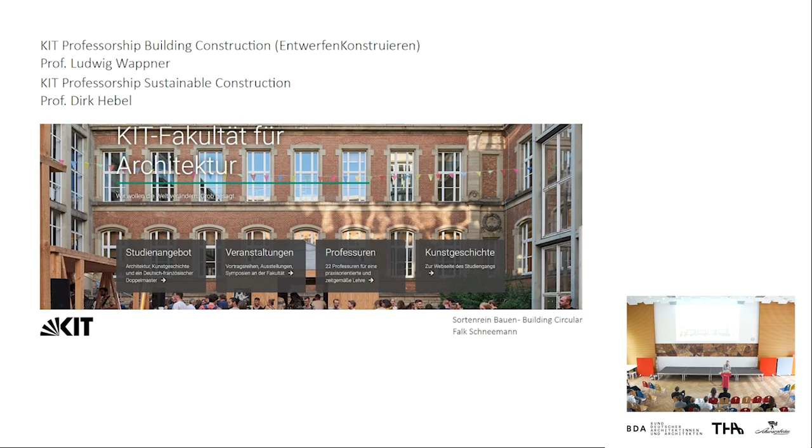Obviously there's a lot of overlap in what the two chairs do, but each chair felt there's also a lack, that we would need what the others can deliver. So we said, okay, let's join forces. We started, that must have been 2020, by doing a seminar which both chairs did together. That was not a fantastic, great thing, but something which was very interesting. We realized that we also had some problems. We found a need to define certain things, and that's what we tried to do with the book.

So we felt the need to define what is sustainable circular building. What is that? We felt that we need to provoke a little bit of a discussion, kind of a philosophy, to approach it also with regards to discussion before you start to design, to construct everything. We felt we need a stable manual, right? You have the Stahlbauatlas, you have the Holzbauatlas and all those things, but there is nothing you pick from the shelf if you ask yourself how do I approach sustainable circular building?

And of course, as architects, we feel the need to give an impulse for future things. I think I don't have to introduce why we think we need to build circular, right? I won't show you those slides of the blue planet and all the problems we're having at the moment. I presume you are aware of that, so I go right into the juicy bit, as there's not too much time to talk about that.

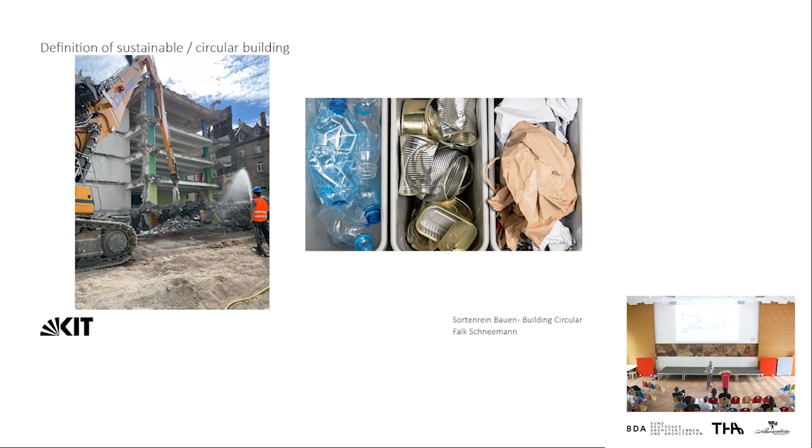It's exactly the same as what we try to do with the garbage from our living. If a house is at the end of its life, and we have a pile of metal, a pile of wood, a pile of glass, then we are fine, we can use that again. This means Sortenrein Bauen, that we separate them to keep them in the loop.

To be clear, that doesn't mean we want to disassemble everything down to only materials. It also applies to building elements, right? For example, a window. We don't have to destroy it to only keep the glass in the loop, if we are able to say, I reuse the whole window.

And buildings were not designed from scratch - those famous buildings you all know are not designed by one architect, but are the result of a long process of building and adding and taking away and so forth.

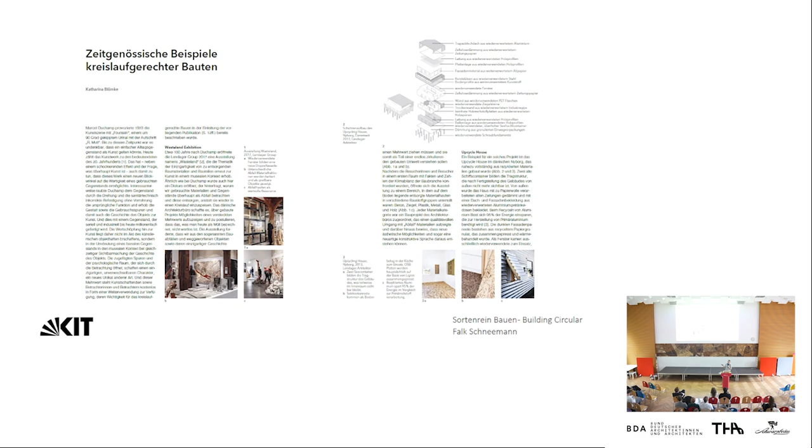Of course, to be able to contribute to the discussion, you need to be aware of what's going on right now. There are a lot of buildings, pavilions and so forth being built, not only in Venice at the Biennale, but around the world, and there is really interesting stuff going on, and you can learn a lot from that.

So the next step is to say we go closer to building. That means you need to choose the right materials. Very essential at the beginning is to say, with what do I want to build? And we have a catalog of materials in our book as well, and our philosophy to this.

That's really like, I'm standing here, so what I tell you is also my philosophy. Not everybody on the team has exactly the same philosophy, but I think there's a core which unites us, so you have to separate a bit. Probably other people from the team would tell it differently, but I think the core is the same.

So we also don't think too much in terms of good and bad. At the moment, if you look at building in Germany, it's built in wood - wood is good, concrete is bad - and we don't think that's entirely true, but you have to differentiate. Concrete can be good as well, also if you look at circular building. We discuss a lot of materials in the book and help to understand them.

And then when it comes to the building, we think you have to also look a little at what's going on - building strategies, let's say - and we're very much interested in digital tools because we think they help a lot with circular building.

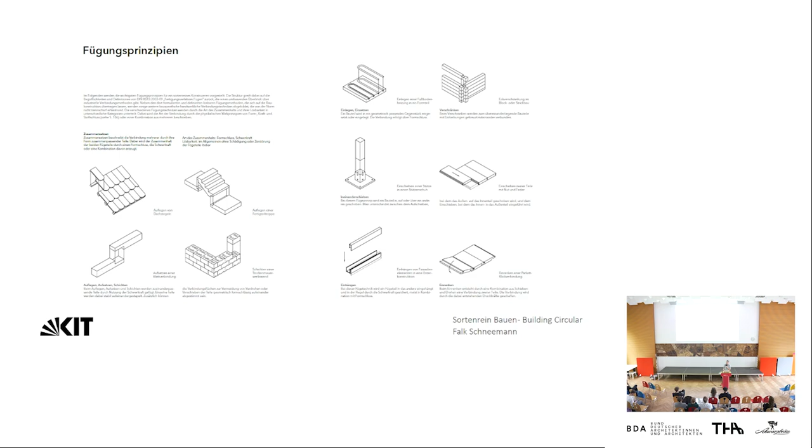And if I want to reuse something, you need to be able to understand, right? I put a column onto the floor - what does that mean? How do I put it there, and how can I take it away, and so forth? So we have a catalog of how do we join things, and the next step is layering, right?

We need to understand, like in a wall or in a floor, what's going on there. It's like we need insulation, we need to make it windproof, it needs to be able to stand certain loads, and so forth and so forth. How do we do it?

And the layering does allow us to take things apart again, because obviously in recent building in Germany, the tendency is to glue everything together, right? The word Wärmedämmverbundsystem, for example, says it all - you glue it all together, and that works well for a certain time, but then you're in a dead end.

That gluing things together, that's something we want to avoid, and that's not that easy, because there's those compound things ready from the shelf for whatever you need. And if you say, I want to develop something on my own, then it gets much more difficult. As a first step, you just need to understand that model, and this is something we want to help with here.

Okay, and then we come to the detail catalog, as we call it. We always write something about the materials we use - so why is wood good, or why is wood not always good? Why can wood also have problems with circularity? And then we have those drawings, right?

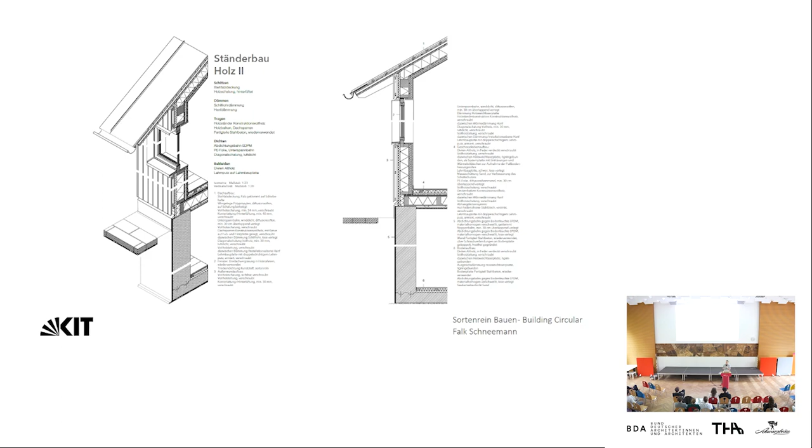And like this, we go through the materials. We have the bricks, and always realizing, the brick itself is not the problem - the problem is the mortar between the brick. Long time ago, until the Second World War, you could take the mortar away. After the Second World War in Germany, they could reuse the bricks, and you can still now reuse the bricks of old walls, but the new mortar is more or less cement, and you cannot get that stuff off the stone - and that's the problem.

Theoretically, you can build in a way where you can clean the stone from the mortar again to reuse it, but German building regulations at the moment don't allow that. So those are the things one needs to understand to then, as a next step, say, okay, what can I change?

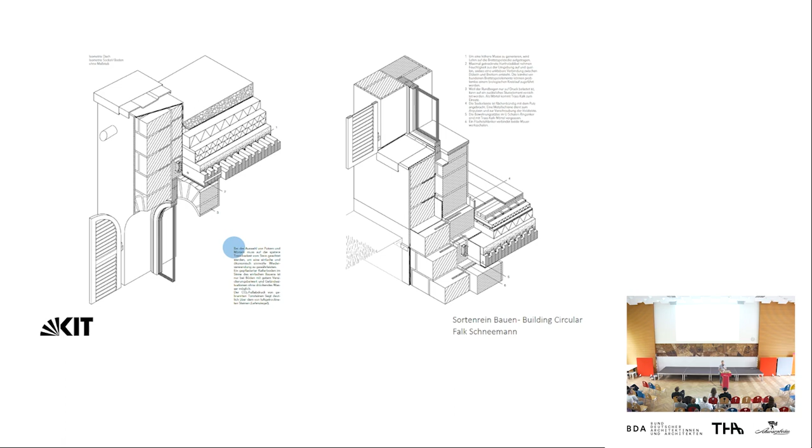What can I do to solve those problems? For our details, I won't go into depth - I think that's useless here to explain, I just want to give you an impression. Of course, the details have the problem that you cannot one-to-one take them and build them, you might get problems with building regulations and stuff. So this is a combination where we think, on the one hand, we try to stay close to reality, so we can give this to students and say this is the basis for your thinking. But on the other hand, we felt a certain need to leave certain rules behind, and say this might be how we can do it if regulations change a bit.

Same with concrete. We have concrete in here, as we do think sometimes it is useful. Just think of prefab concrete - you can use those building elements again. So if you use them often enough or long enough, we think concrete can be a good thing to do.

Steel is also interesting, because steel, like all metals, can very easily be kept in the technical circle. The problem is the coating - you need to paint it, to coat it somehow to protect the steel from corrosion, and getting those things off is really a problem. So how do you deal with that?

Those are all the things one can learn when going from the book. Clay is a really nice, fantastic material, but the clay itself needs to be certified, and there are only a few factories in Germany which provide certified clay, which means you have to transport the clay a long distance. If you ask the experts on CO2, they might tell you concrete is better than clay, because the concrete is produced like 20 kilometers away, whereas your clay is transported over 200 kilometers, although it's the same clay you have right next door, but there's no certificate for that. So those are things one needs to understand - it doesn't change the detail of where the clay comes from, but that's the reality of building in Germany and probably elsewhere.

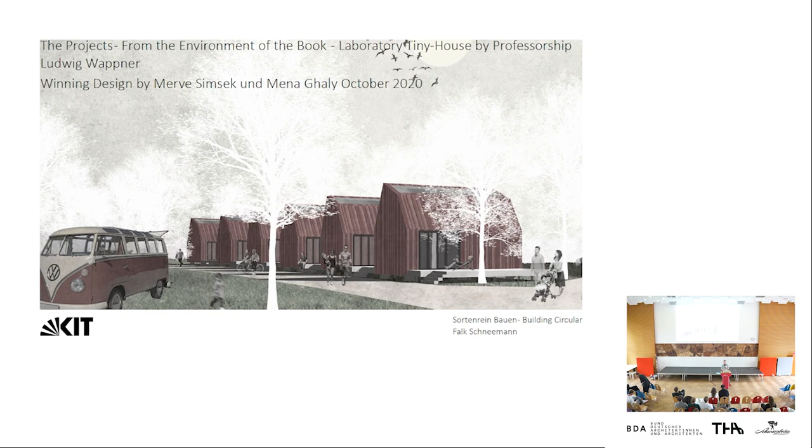That was really, in the beginning, a bit naive, and we had Corona. So this is how we started, saying let's build that house with the students, and yeah, but somehow we moved - we found partners, which is very, very important. So we have this Bauwerk Schwarzwald, which in the end of the day is the wood industry of the Black Forest, who said okay, we support you.

We have a school for carpenters in Freiburg who wanted to work together with us, and another school for building-related things like the ComZ. They all said, okay, we join you guys, let's build that house. That gave us the optimism to say, okay, let's build it.

So really a very small house. Here are the plans, very simple, 4 beds, 4 people could live there for some nights, and section. Obviously the design of the students was not that detailed, but we took their design, and together with a team of students, not only the ones who did the design, but also others, we brought the detailing and everything further. Yeah, it's just that little house.

I also think those drawings are very important, because you need to understand structure-wise what you are doing, how do you assemble it, how do you disassemble it. If you understand things, you're almost there to solve your problems. So yeah, very important to draw.

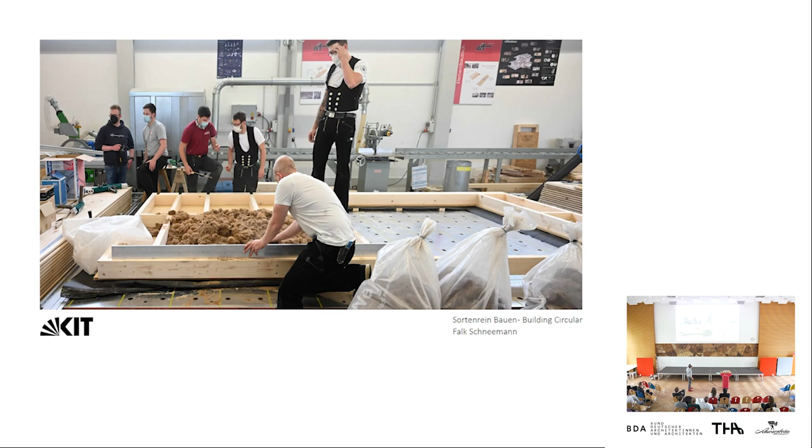This project would be worth speaking about for an hour only, but I'll go to it rather quickly, just to give you an idea. Building the wooden walls, this insulation comes from the sea, you find it at the beach. That's a company in Karlsruhe, NeptuTherm it's called. So it's really stuff you find at the beach. Really wood without glue, sounds that simple, isn't that simple?

Just one detail I want to show you: how to join 2 beams, and we wanted to use little steel. As you might know, screws are a good thing, but if you screw parallel to the fiber of the wood, that doesn't work, the screw is just pulled out. So what do you do? We did those wooden nails - they're not called that, they're called Dübel - which we just put perpendicular to the fiber into the wood, and then you can screw, and the result is perfect. It's that easy, but you have to calculate that, you have to find the right screw. In the beginning, the screws just broke because they needed to be too long, and so forth. So it's very easy in a way, but very complicated to make it real.

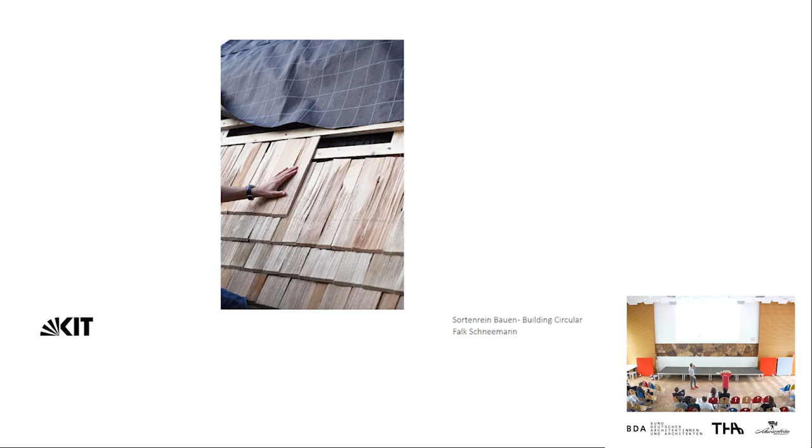Only one example to show you what we were busy with: for construction we used those shingles. That's also a very nice thing, old traditional technology - well, technology is maybe not the right word - nobody of us ever used it before. So we looked at that, and we find it's very complicated on the one hand, but you can do it on your own on the other hand, if you follow certain rules. You find out that most of those come from a factory where they are cut with a big saw, and that's not what you want. You want those which are broken, because then the fibers of the wood are still closed and the water wouldn't go into the material but down the roof. So all those things you need to find out, you need to check where do you find the material, and that's the result then.

And then the last project I show is a project I did with my office.

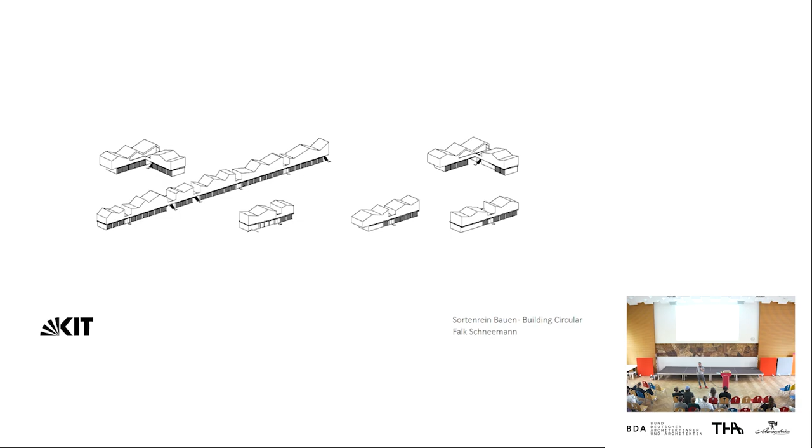So for them I did a lot of studies, and one of them we realized, that's that one. The great point was when we decided to build it, we got really great funding from the state of Baden-Württemberg, and they said, we like this project, we need those kind of ideas. How can you make it more interesting, more innovative? We said, okay, we do it circular. They gave us extra money to make it circular, and with this money we could also pay the chair of Dirk Hebel to support us. That made it really, really interesting.

So also here, very briefly, watching the time, I go through the project. It's a post-war settlement where we were able to build that. We built 3 of them, with 1, 2, 3, 4 flats in each. Obviously it goes together with how do you upgrade this post-war environment, give it a new identity, bring young people there. Students have lived here since the 1st of October.

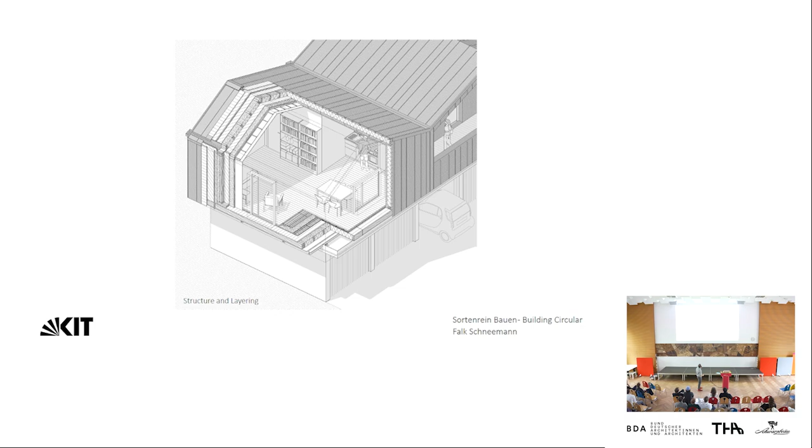Again, those drawings, I think, I draw them to understand it—the layering and the question of how can you do that circular and everything. Then I just show some examples of how we did that. Right here you see the assemblage of the walls and hemp insulation. So far it's easy, and obviously you need those planks, this scaffolding on top of it.

And there come some questions with this scaffolding. First, they fix it with this machine—what is in this machine? Because normally it's nails, and if you want to get nails out again to reuse the plank, that's very difficult. The second question is this needs to be windproof, windtight. How do you do that? Because you don't want to use any plastic stuff to seal it.

So we found two answers to those two questions. First, this is how those planks look—they have this Schwalbenschwanzverbindung, however you call that in English, and that makes it to a certain point airproof, so you don't need any plastic foil or something to add. The second thing are those guys, so you can shoot them into the wood as you would shoot a nail with this orange machine, but you can screw them out.

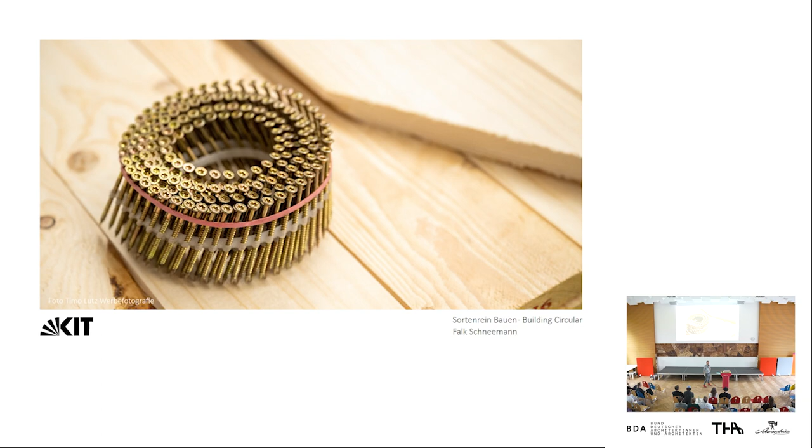You can also screw all those planks, but that makes it much more expensive and takes much more time. But if you find something to shoot in and screw out, which already exists on the market, you just have to find it—then you've solved a lot of problems for circularity. So this is what we did.

Another thing: this house can also be disassembled, brought to another place, and be reassembled there. This is also something we got money from the state for, to make this possible. So one problem—and I really go into depth at certain points to show you there are hundreds of other points I could talk about—is you prefab the walls. What do you do with the electricity if you take it apart again?

And we found a system where you can plug and take it away again. So if you want to move the house, you can simply unplug your electricity between the walls, transport your house to another place, and reassemble it.

We did a lot of urban mining, so those floors, which are about 100 years old, were reused in our apartments. This is an estate from the client, and they said okay, we want to try this, we want to learn that our buildings are an urban mine. So we did it, and it worked well, but it was also much more difficult than we expected.

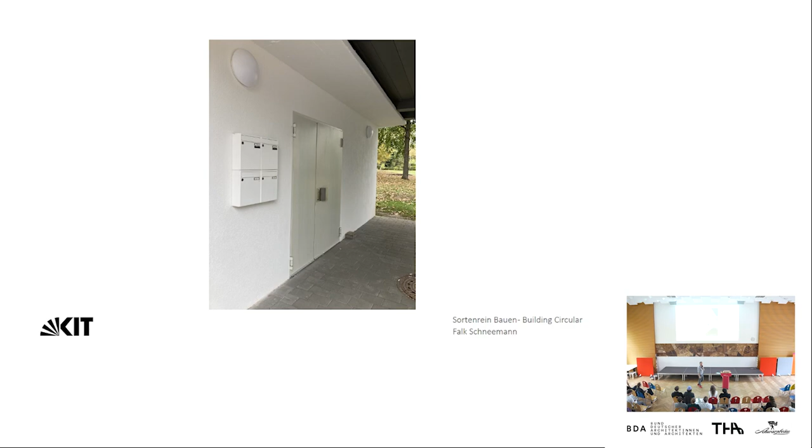We reused old doors, so those handles also, little details like the letter boxes. Those are also old letter boxes which we took from a house which would be demolished soon.

And last slides then kind of, so here you see the construction, so it looks like normal timber building. Under us there are the garages, and for example, how do you deal with the bathrooms, right? Those are prefab bathrooms from a material which is not that well for circularity, but to do it well, the only circular bathroom would be of stainless steel, and that costs way too much money. So we used those, but we can take them out again, we can refab them. So in that, it works not perfect, but it works okay, I think.

And this is how it looks like now. As I said, 1st of October, people moved in. So those are still not the final photos. We've not finally evaluated what we actually did there, but that's the finished project.

And I also think I like those because, in the end, we're still architects. I think it's also about nice space and things which look good and aesthetics, and this is why we do it. Circularity comes, at least for me, on top, kind of. So yeah, I like those spaces, those spatial conditions here, right? And the dialogue with the old buildings.

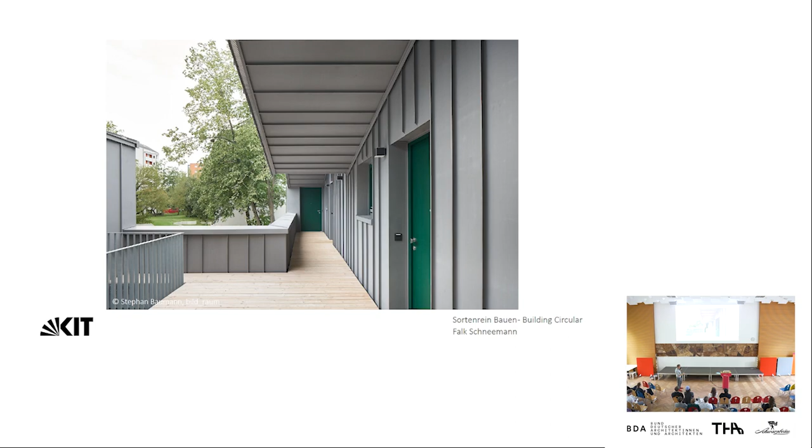And yeah, with the trees, which are fantastic. So it's really like living in a tree house a bit. Actually, really the old floors, right, 100 years old, you don't actually notice they are. This is also a 100-year-old door in our new house.

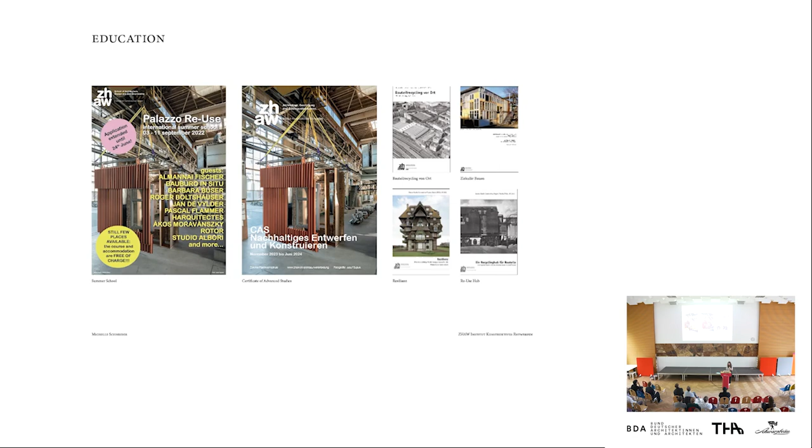We also try to help architects through competitions. This one was actually a winning project.

We have several research topics currently. We have one on how to reuse concrete, just started, it's kind of new. We also have the topic of reusing steel, how to make this happen.

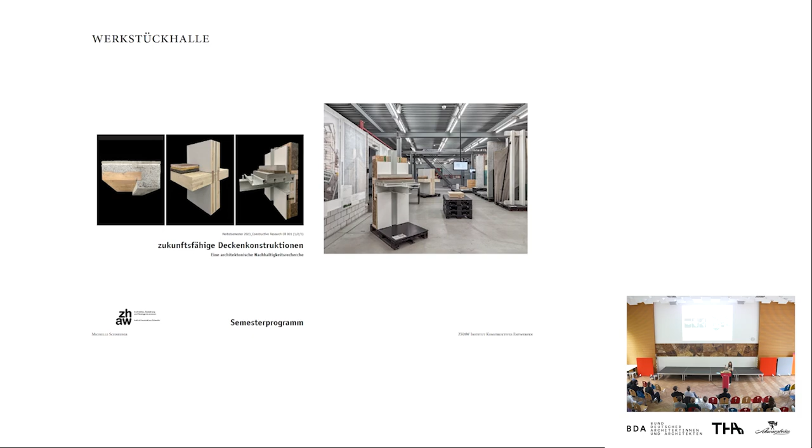We're also interested in materials, so we have a Werkstückhalle - I don't know the English term - where we receive new mock-ups from different firms every month. The last one we received was from Herzog & de Meuron. It's kind of cool to see all these materials, to be able to touch them, and then put them into the students' projects.

We also believe in games. We think we can learn a lot, not only with PowerPoints, but with games. That's our latest game - it's about reuse, and you should learn everything I'm telling you this evening, and a bit more, with this game.

We also have digital games. This one just started as well - it's like a SimCity where you begin in 1950 and then you have 1 year to make your city CO2 neutral.

So why reuse? I think you've seen this - 37% of global CO2 is from construction, from us architects. And the number I find even worse: in Switzerland, but I think it's the same in Germany, 82% of waste is also from construction. So I think this is really something we have to address, and reuse is the most impactful way to do both - lower CO2 but also reduce waste.

When I did these interviews with firms about their products and their green programs, I quickly realized that my idea of sustainable and their idea of sustainable were not on the same level. It was often greenwashing, and when I asked questions about reuse and whether we could implement it, they often responded, 'yeah, we do reuse.' For example, they'd take our windows back, take the PVC, and put it back into a new product - but that's not reuse. That's why I'm trying to explain quickly what the difference is.

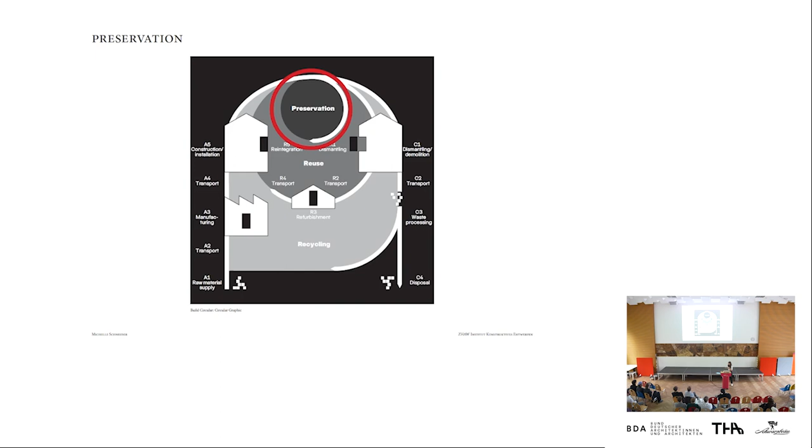The first steps - raw materials, manufacturing, installation - are the same everywhere. The first and most effective step you can take is to preserve: you keep everything in place, leave it where it is, sometimes clean or repair it. Then you have reuse, where you have to dismantle, transport, sometimes repair, and put it into another project.

Recycling is more like demolition - you have your waste, a lot of it goes to disposal, and the rest can go back into the loop. What's interesting is that most CO2 comes from manufacturing and raw material supply, so even if you recycle, it's not enough to reach our 2050 goals. With reuse, you're at about 10% of the CO2 of a new material. With recycling, it depends on what you recycle, but it's around 75-85%.

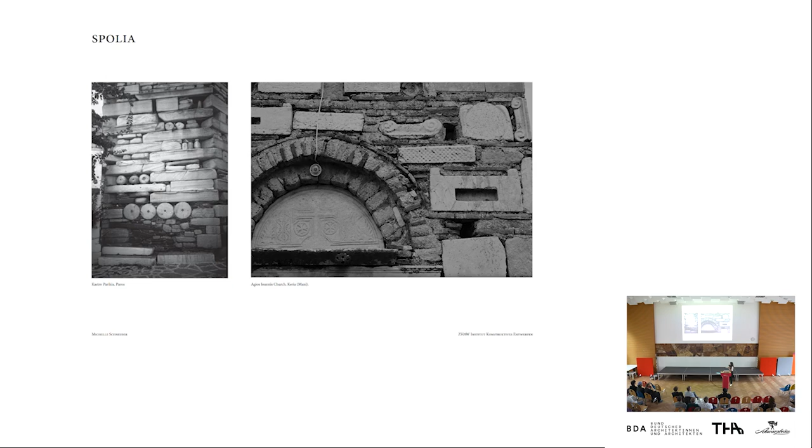Architecture versus climate, that's the big debate right now. This is a very nice article—there were two redactors, one from Hochparterre and one from Werk, Bauen und Wohnen, and they both wrote an article about the new headquarters of SRF, which is on national TV. One said it was a really great building, nice architecture, and the other was a bit negative because of the ecological side. So it's kind of architecture gossip—they had a fight, writing back and forth to each other. At the end, they made an interview with both redactors and one neutral person.

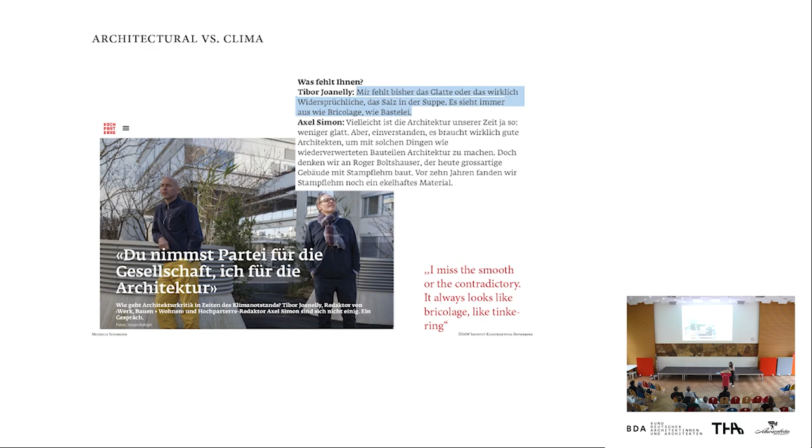They talked about the impact of climate on architecture, and one of the questions was, what do you miss with reuse? The answer was, I miss the smoothness, or the contradictory—it always looks like bricolage, like tinkering. Bricolage is a word that comes up in almost every article about reuse. I'm from the French part, so I knew the word, but I never used it with architecture—maybe at 4 in the morning finishing your model, but not for my facade. Here, it means the use of available resources to solve a problem rather than developing a specific solution to the problem. It's kind of true, but it also sounds a bit negative, so I wasn't sure—is it a good or a bad word?

Later it was often used with DIY. For example, here's a project from Walter Segal, from when there was a crisis and nobody could afford homes anymore in England—an architect designed houses you could assemble like IKEA furniture. The latest example I saw was in an article where people weren't okay with demolishing a whole hill to make concrete out of it, and the article used bricolage to describe how they lived. So it's really seen as a bad word to associate with architecture.

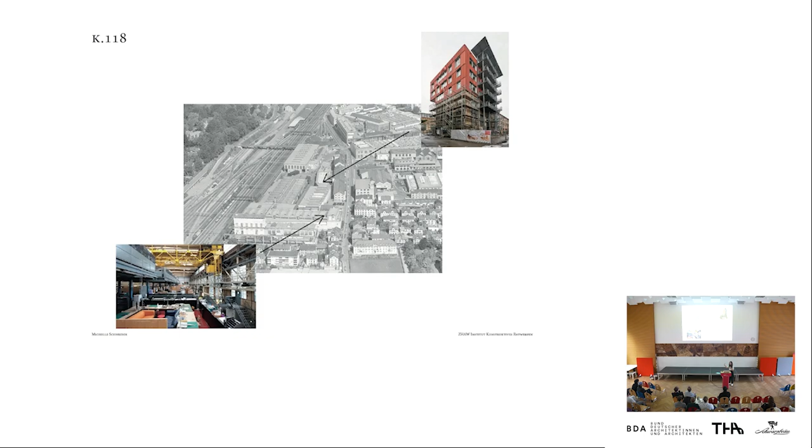There is like this 2 levels floor industry, and they put 3 levels on the top.

And what I found very interesting is this word of tolerance, and that it's really the thing you need to have in views. For example, the walls - I mean, they didn't know how big the windows will be until almost the end. And so they had to have an idea how to tell the constructor, like, hey, we don't know how big it will be.

Please don't build it like now. And so they have this prefabricated timber construction that they could make super quickly. And in the middle it's some straw, so it's also kind of flexible if you have a bit more or a bit less.

Also on the facade, they found these steel profile panels on the industry next to it. So they took them down, and then afterwards they realized they're not all with the same profile, because I think the north facade or the west facade was once refurbished, and so they couldn't slide it together how they wanted to. That's how this detail was made with several levels, and that's also something with tolerance.

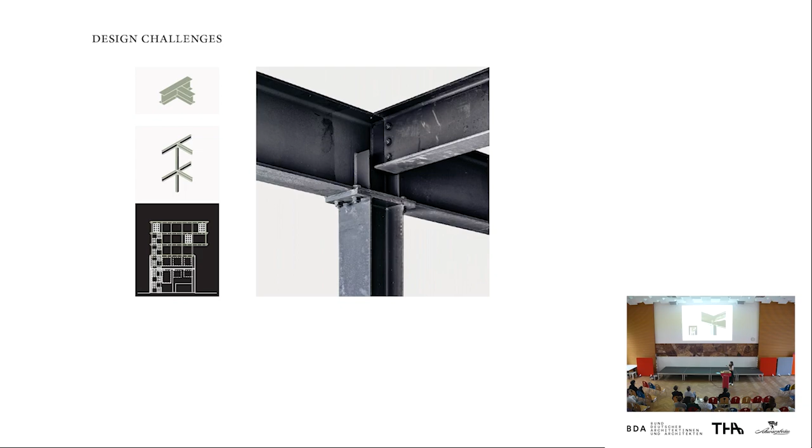Second, they found the steel structure. And this is kind of funny because the footprint of the building and the structure of the steel doesn't match up, because it's not a square, it's like a square with this angle on a side. So they had to choose between: okay, we adapt, we cut, which costs a lot of money, or we leave it like this and have this - I don't know how it's called - Auskragung. So that's why they have an Auskragung, not because they wanted to, it wasn't planned, but it kind of happened.

They also had planned a staircase inside the building, and they found one which was the good height, but it couldn't serve every level. So they had to put it out, and now it's a big element on the facade, but also it wasn't meant to be here.

On the same urban mine, I found also these granite panels. They were throwing away, and one of the Bauteiljager was super sad about this, so he took it with him. He didn't know if they could use it anywhere - it was too heavy for the facade. And now they have a super fancy staircase outside with some granite panels.

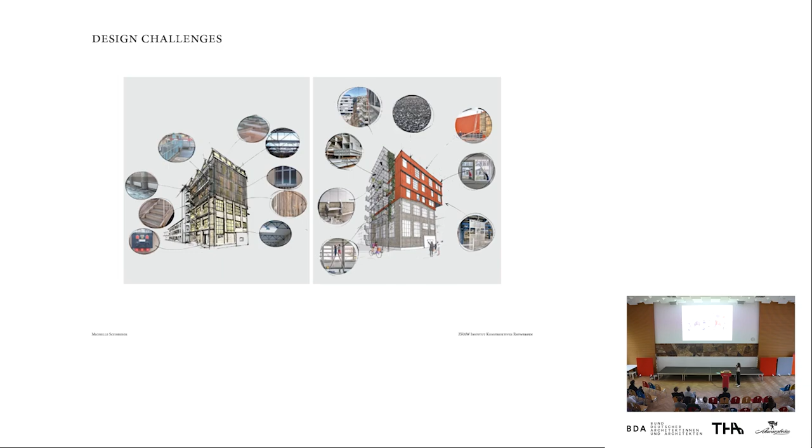And also the doors where we used - here also you have this kind of flexible timber construction and the steel panels. So it's kind of the drawing on the first day of the project and how it finished. So it's really, I mean, it's 2-3 levels, but otherwise it's not the same.

There is also a lot of new things with logistics. It looks complicated, but I will go step by step. The first thing you have to do is search all the materials.

What they do is work with demolition firms or with Bauteilbörsen. One very famous in Belgium is Rotor. And so over the years, they have a lot of contact privately, and they now know where they can go to find something.

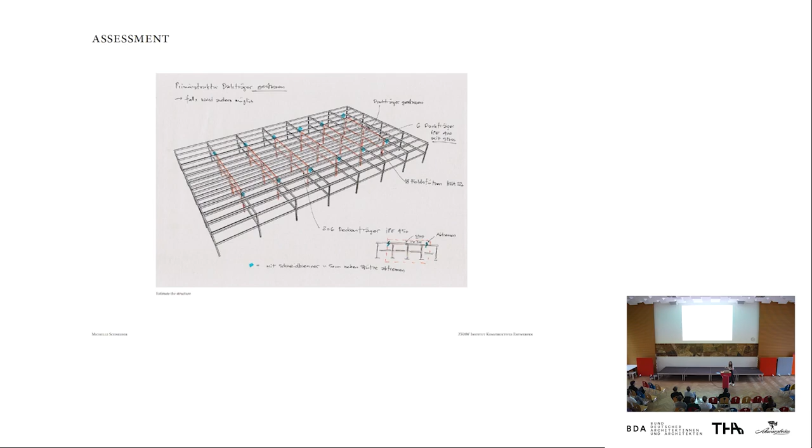Then is the assessment. Once you find all the components, you have to make sure that it also fits your project, not only architecturally, but also statically or maybe fireproofing and stuff like this. For the steel construction, I think they had an afternoon to decide if they could take it or not. So you have to work with an engineer willing to do all the calculation in one afternoon or one hour. It all happened super fast, and they were calculating, I think, the worst case scenario - if it was really bad steel, if it works - and it worked, so they could do it.

Then you have the documentation. Once you say you want it, you really have to measure it, everything super precisely. And what they do, hoping that nobody steals it, is put this kind of sticker - and yeah, it didn't work all the time, I think.

And then what's kind of the difficult part: you have to go to the client and tell him, we don't have any project, we don't know if we can use it in the project. We kind of think we can, maybe 90%, but you have to buy it now. And that's kind of the big problem with reuse right now. Also, you don't only have one company to do contract with.

You see underneath, that's all the companies that were in contact just to dismantle and reinstall a window. And then you have the dismantling. They also can only take things that a human can dismantle. They don't have any fancy automated machine or something. So really, here it's only the panels that you can take with a ladder that go away.

And at the end, the transport. And you also have the storage. I don't know anything about storage, but now it's the architect who has to also look into this. Here they have the garage, but often it's also made by professionals. And it's also a very big expense that you didn't have until now. And at the end, if all the steps went well, you can reinstall it.

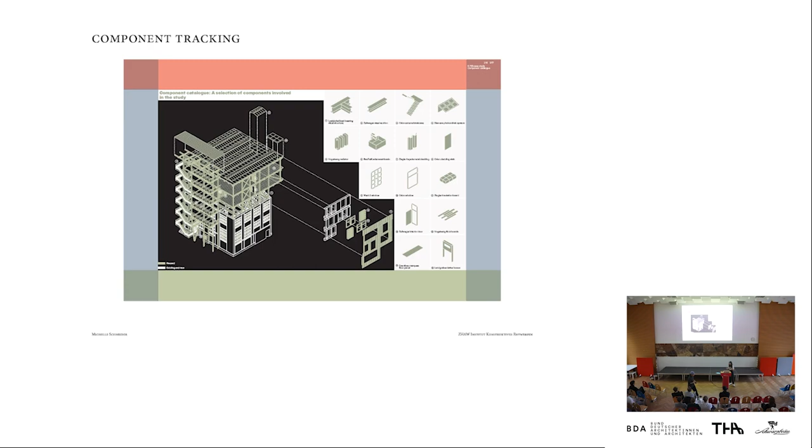And ZHAW could track all this component, which is pretty interesting — really from the beginning, where you took it, until the end, where you put it back. And they also looked at the cost. The thing that costed the most is to reinstall it. I mean, manpower is not cheap.

And it's kind of almost cheaper, but not every time. So that's also something interesting. You would think that everything must be more expensive because it's kind of new.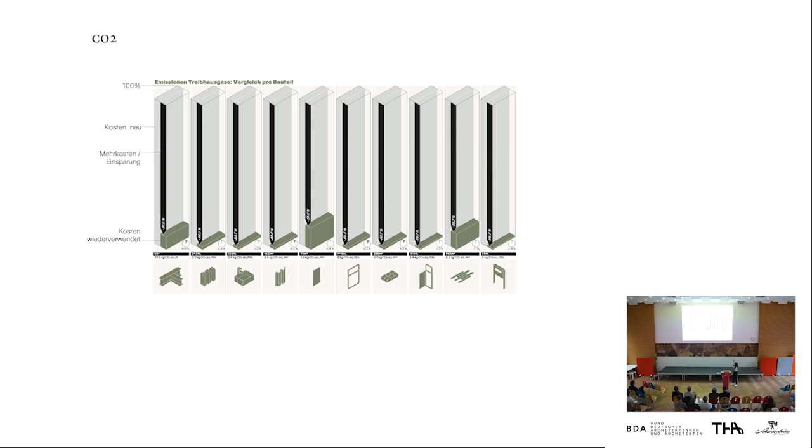And they also looked at the CO2 emission, and that's interesting, because the transport is the biggest CO2 problem. It comes from Basel to Zurich, which is maybe a third of Switzerland, about 1.5 hours by car. So here you see it really makes sense on the CO2 level — you're really around this 10% I said before.

So the result is that they could save 60% of the CO2 compared to a new building. In the remaining 40%, there are some problems — some issues with the structure, so they had to pour concrete, mostly because of a fire norm or another norm that forces you to put something that's not ecological and maybe also not easy to disassemble. So maybe we can do even better in a few years.

And that's my master thesis. So I kind of knew all this story because it happened just next to it. And my concern a bit with this topic of reuse was the facade.

How should the facade look? Must it be like really this kind of, okay, I have a window, I put a window, and I have this, I put it like this. And I kind of looked at it and wanted to find if there was any process to make this easier also for architects.

Little number: 1 square meter of window is 2 to 3 times worse than 1 square meter of concrete, which is 20 centimeters thick. So it's really a big number, because we all say no concrete anymore, or as little as possible. But next to it, we make skyscrapers with only windows, so maybe it's something to keep in mind.

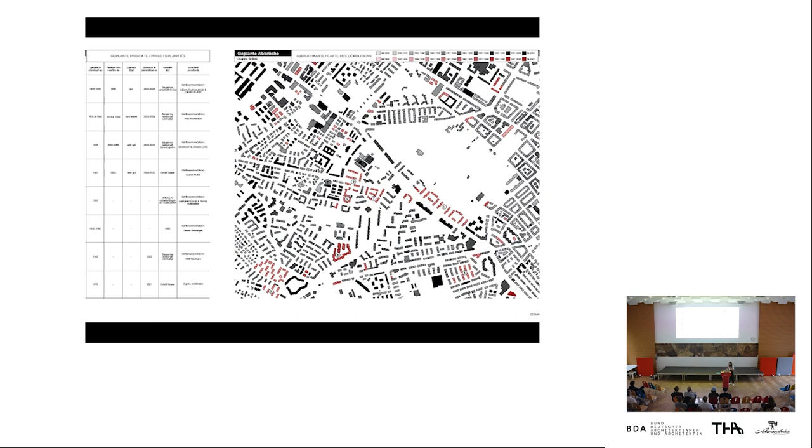For that, I chose 4 projects, 4 Siedlungen, and I counted every window that could be found there, almost 4,000. So it's a lot. I drew them all to show you how much it is.

But there's one good thing: with all the windows that I found, a lot of them had a similar size. There was a Göhner who was a carpenter and wanted to make as much money as possible by selling windows. So he thought about how to make more windows faster, and for a year he tried to only sell one size of window to every client, and it worked. So all the other window manufacturers tried to do the same.

Between 1920 and 1960, you can find a lot of window catalogs with a lot of standardized sizes. So it's really that window of 120 that you can open in the middle that was the most sold.

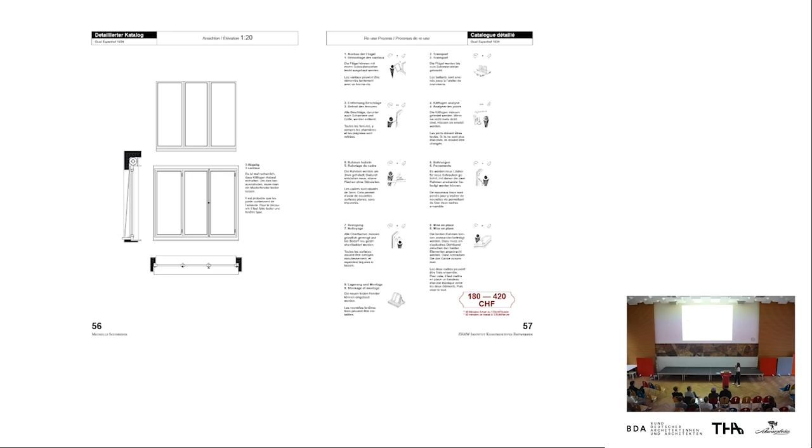What was also important was the heating - you don't want to heat more because you have bad windows. So we calculated: if you put two of the old windows together, how would it be? You have to heat less with two old windows than with new ones, because the new windows have protection against the sun, so you cannot gain any sun energy in your house, which you can do with the older ones, without the solar protection.

Because it's an architecture thesis, there's also some architecture in it. For me, a window shouldn't just be a hole in the facade that you can open and close. There are some fancy references that we don't really have in Switzerland, and I don't think you have it in Germany either, but it was the basis to create some new rooms with these windows.

I took every room and looked at a wish list of what I wanted to do with it, then used the windows I found to create those spaces. So that's the living room, the office, the kitchen with some shelves.

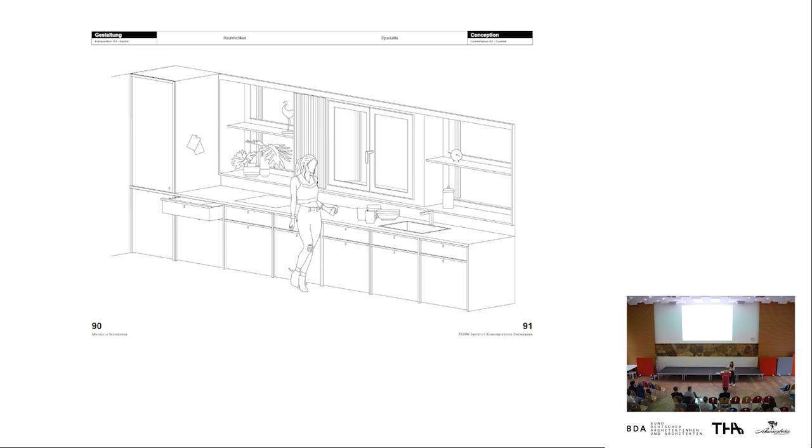What's also important is that you don't need to open every window, which is the case right now, and that's also why you can't keep those windows too long, because the metallic mechanisms get broken. And in the bathroom, you can also look outside the window from your bathtub.

And the bedroom. And for winter, we really like to make it look like we can build it tomorrow. So I had to choose where we could build it, and there was this competition from Lütjens Padmanabhan and Caruso St John. It's here.

They will build it, I think, in a few months. They had every ground floor already made, and I did the facade for their project. I mean, they won't build it, but they have seen it.

And so it looks kind of like this. You see this kind of very strong 60 by 120. And what was interesting is because all the windows are kind of the same sizes, the sun protection also has this size. So it was taken to put it on the facade, and sometimes you can put it down and then you have the protection.

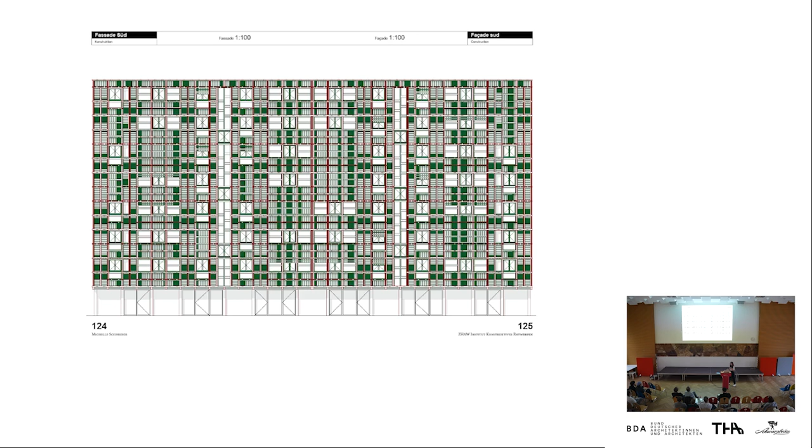Here you see every room has its own kind of window. And yeah, here's the sun protection.

And then I looked at what is new on my facade, what is reused, how it differs with the prices and the CO2. So you see in green is everything that is reused, and where it is new, there are big differences in price and also in CO2.

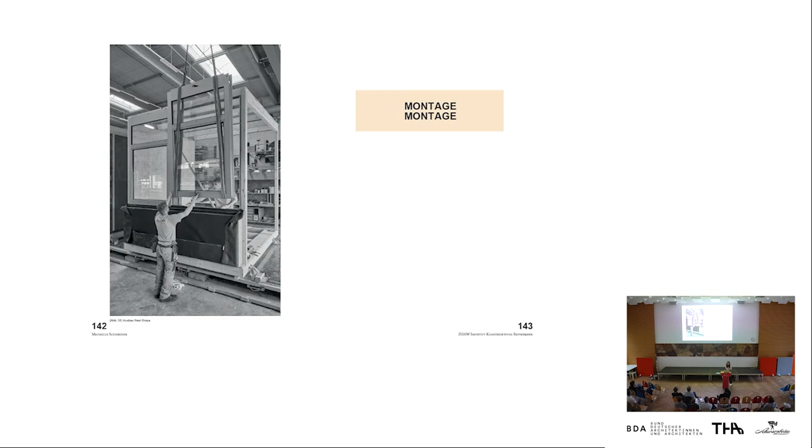It's like in the K.118, kind of the same principle. You would put the windows in before you put it on the construction site, and at the end you would assemble the facade elements. What is also super important is, because it's a reuse window, you don't have any guarantee on it, or at least not now, so you should be able to dismantle and put a new one pretty quickly if it doesn't work. And so that's an idea of how it could work without any scaffolding, which would be super expensive.

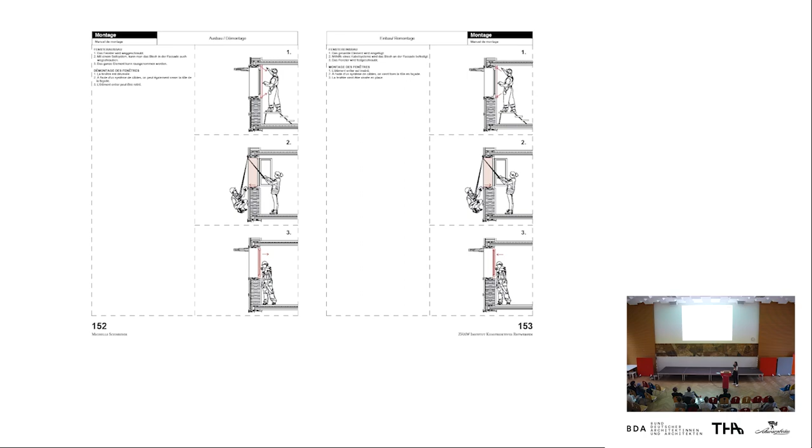And then the costs—I have an idea that it could be about the same price as the facade from the competition. But I mean, we haven't tried it, so maybe don't look too much at the prices.

Last thing—I did all my semester with reused materials. I was thinking if I do big theories about reuse, I can't do some models with super expensive new products. And then I found out that in Germany, from the TU München, there's a competition for reuse models where you can take a picture and send it in. So maybe that's a thing for you. And yeah, that's it.

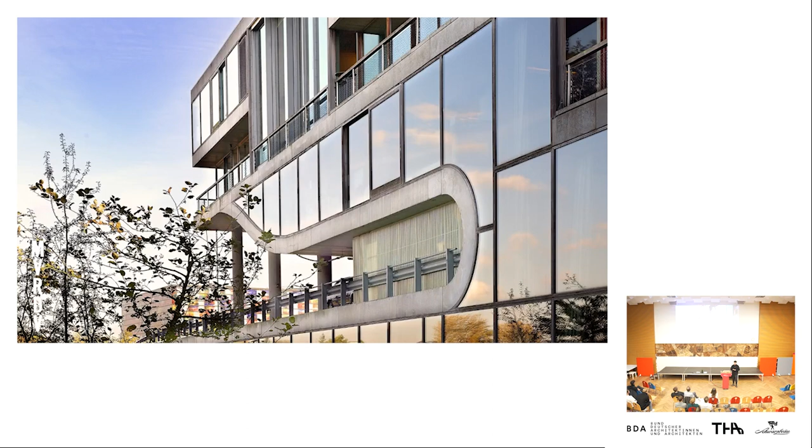Maybe you heard our name through some famous early projects, the Villa VPRO in Hilversum, and the Dutch Expo 2000 in Hanover, and the WoZoCo in Amsterdam for the elderly, residential, and the Silodam, and the Tianjin Library, and Seoul Skygarden - by the way, this is a reuse project. And the depot, which is for the Boijmans Museum, as a public archive for the art pieces, art collections of the museum. And of course the market hall in Rotterdam.

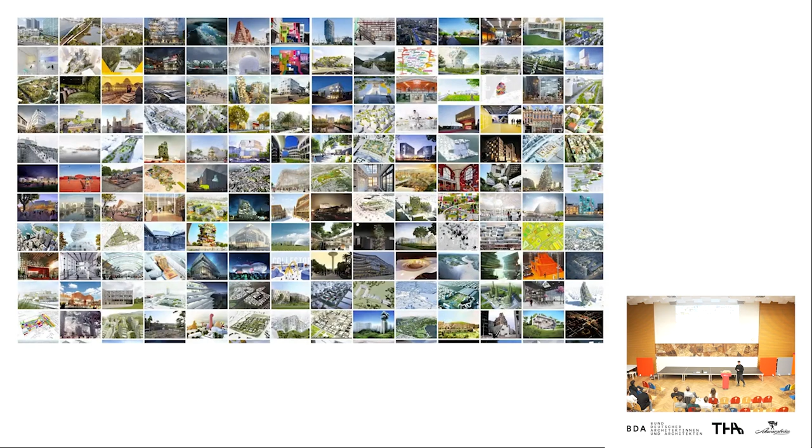Together with many other projects we do globally in the world. And apart from the projects, we also publish a lot of books with our thoughts. And on the side of running the office, we also engage with academia.

This is the Why Factory, which is run at the faculty of TU Delft, which focuses on exploring future cities. And again, the Why Factory also published their research through a series of books about future cities.

So a little bit of history of MVRDV. It's always been data-driven. The early works and early thoughts of the office pretty much focus on data. For example, the book FarMax in 1998 - from the name, it's like focusing on maximizing the FAR. So it's talking about density. What is the extreme density you can imagine? As we know, the Netherlands is one of the densest countries in the world.

And here the KM3 - it means from cubic meter to cubic kilometer, since the space we need nowadays is much more challenging than the old days. And also the Metacity Datatown, as an example, is a brutal visualization of a fictional city made completely with data. And there's also a video imagining the whole Netherlands compressed into one cube with a dimension of 3.5 kilometers.

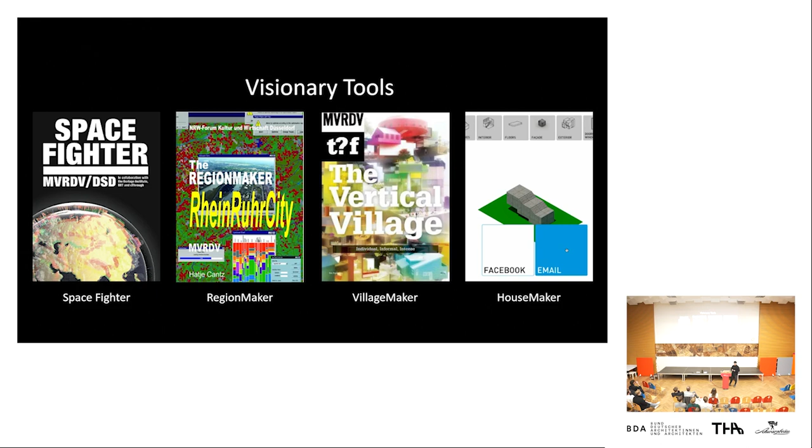So based on this context, in 2017 we founded a small in-house computational expert group called MVRDV Next. Next stands for New Experimental Technologies. Back then, it was pretty much focusing on computational design. So the first version of MVRDV Next was really a small team, 5 people, focusing on computational and data-driven design.

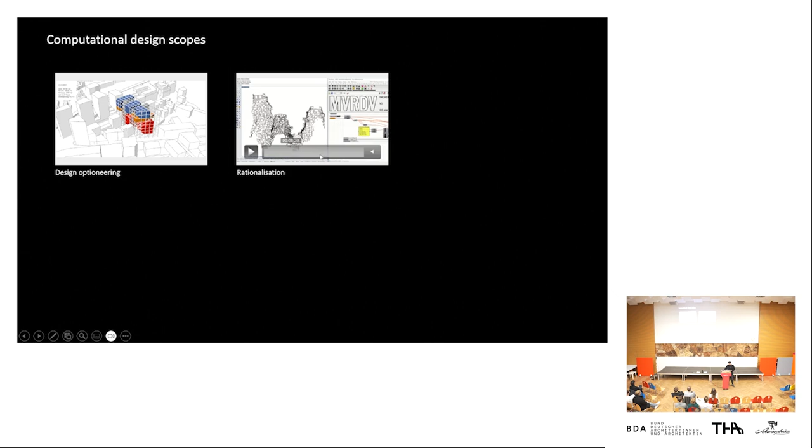So back to the computational part of MVRDV Next. These are our design scopes, ranging from design optioneering. We develop certain scripts to help rapidly visualize different options, and also for complex geometries, we develop scripts to rationalize them, to make them feasible for construction and later phases.

We also have performance evaluation, which goes together with design optioneering, because every time you have an option, you have to evaluate how good it is. And we have advanced geometries, like those geometries that without computational tools are really hard to make.

We also have research and development. Here we usually work together with some governments and city halls to visualize the impact of their policies on an urban level, and propose some scenarios, some what-ifs.

And the last scope is new media, which personally I'm very interested in. It's about using computational tools not only as a problem solver or as a design tool, but also as a way to retell a story in a more interesting or more inspirational way.

So altogether, the scope of the computational team makes this cloud. It has two dimensions: one is horizontal, from visionary ones towards more realization, and the other is from small scale to large scale. Our scope sits somewhere inside this matrix.

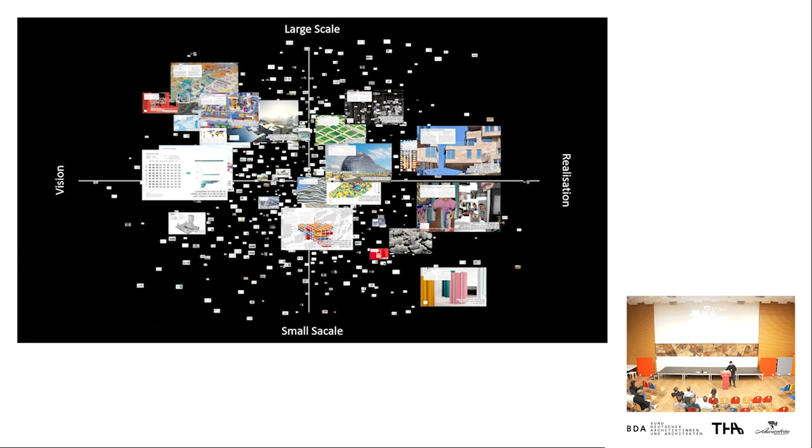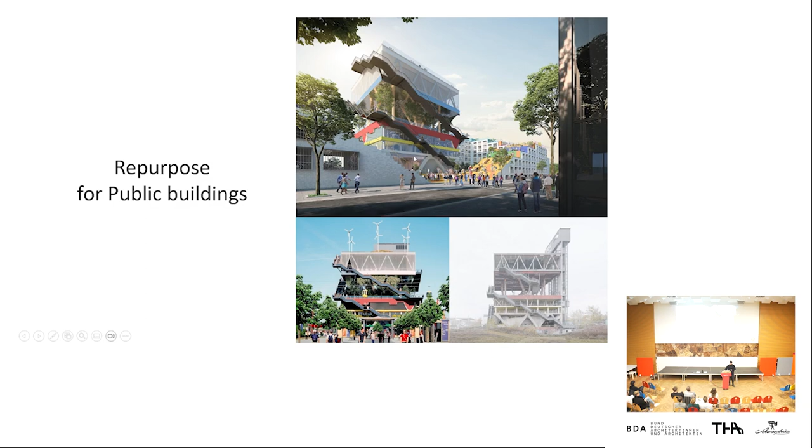Scaling up further, we repurpose public buildings—of course, the famous Dutch Expo in 2000. It was really amazing in the picture, but a few years later, it looked like this, so it's not in good shape. Recently we've been working on a plan to reactivate the building and give it a new life.

We also reimagined some circular dreams, which are not yet very physically feasible to do. By the way, regarding the question asked before, here is one example of Concular as a database in Germany.

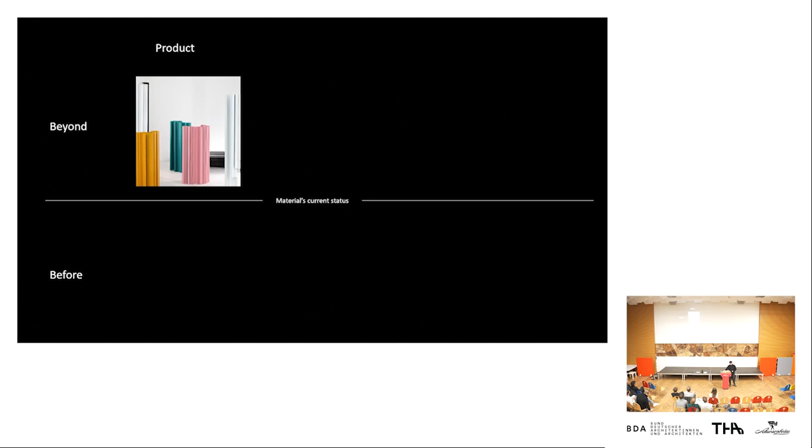So back to the scale of reuse, we have product, facade, and building. But these two, the lamp profiles, are a 'beyond' — we're using the profiles to give them a new purpose. And this facade project is also a 'beyond', because the waste is in front of us and we ask what we can do with it. But this other one is a 'before', because the building is newly built, and we are thinking about how to dismantle it and how the materials can be recycled elsewhere.

These are the three projects I'll be highlighting. Since I'm from the computational part of MVRDV Next, as the event introduction indicated, I want to discuss what role data-driven design or computational tools can play in the practice of reuse.

So first, let's look at the lamp profiles — the product, a 'beyond'. I think the role of data-driven design here is mainly about optioneering.

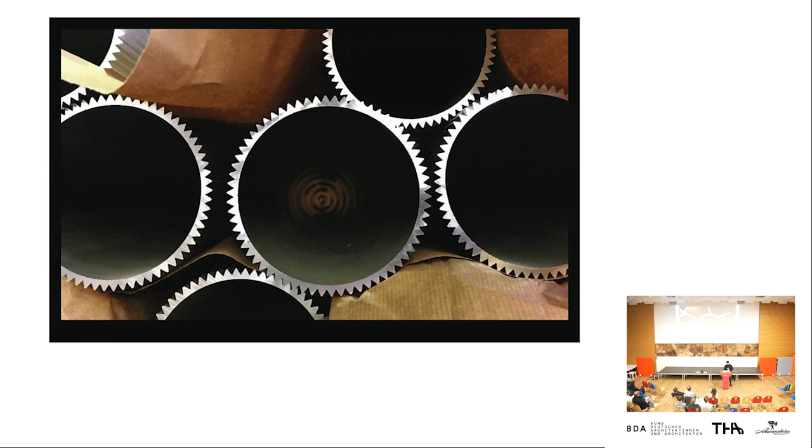This is a project with Delta Light, our client, a lamp company from Belgium. They have very fancy lights made from profiles, very clean. But we toured their factory and saw a big collection of waste — these profiles are super expensive leftovers, and they didn't know what to do with them. So we came up with the idea of using these leftovers to make something new, a new lamp.

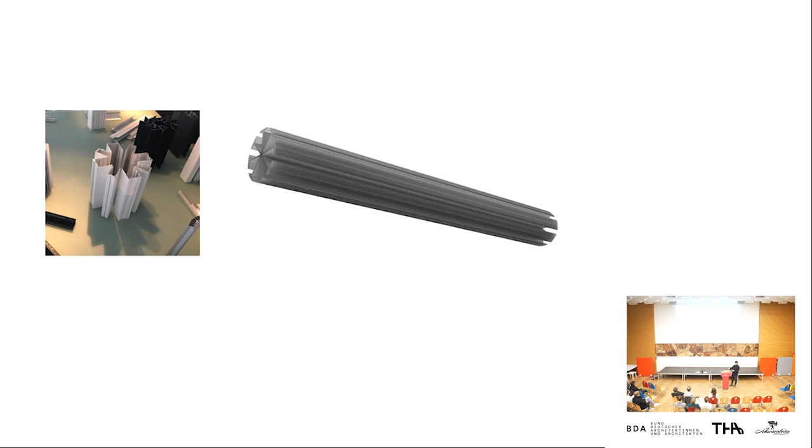We started with random brainstorming to see the possibilities of rearranging and recomposing the profile leftovers, also testing the light effect when there's a light inside, and how it looks with different colors. We made some mock-ups and looked into connectors, because the profiles can't just sit loosely next to each other — they have to be connected, and you have to consider how the light can be installed and integrated into the composition.

This is the scripting part. I developed a script that can look into the database of all the profiles, keeping monitoring the composition — the profiles needed, the number of them, the type of them, and other parameters like rotation, height, and shift. It's a way of quickly visualizing all the possible compositions with what you have at hand.

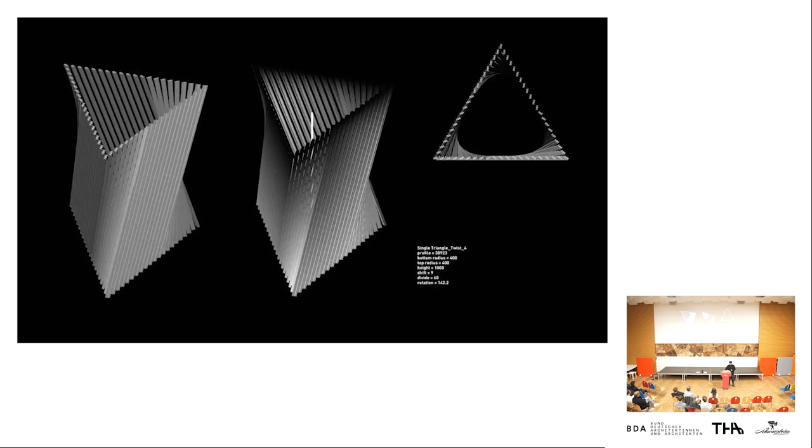In the end, we suddenly had a lot of mock-ups, possible lamp compositions. Then we moved on with Delta Light — the company sent us a big box of all these leftover profiles, and we started making handmade mock-ups. These are the connectors we proposed, where you insert the profiles into a laser cut on both sides to stabilize them.

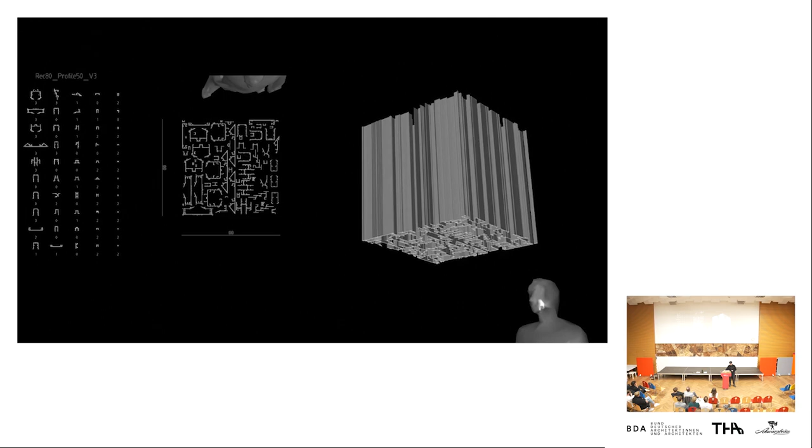In the end, design-wise, we went for a more geometrical, holistic shape, like a cube or a tube. Here we used the script again to quickly and automatically generate different kinds of compositions, with different sizes and diversity of profiles. Sometimes a lamp is made of only one profile type, but sometimes every profile can only appear once.

So we made a collection of designs — this is the family photo of them. But in the end, we killed this one because it was 2 meters long, and then it's not really a leftover anymore, since you could still install a 2-meter piece somewhere in the ceiling.

So it goes against our idea of reuse. And then these are some mock-ups, like technical models from Delta Light. And this is the first, let's say, a bit serious mock-up, more than the in-house ones from us, the cube.

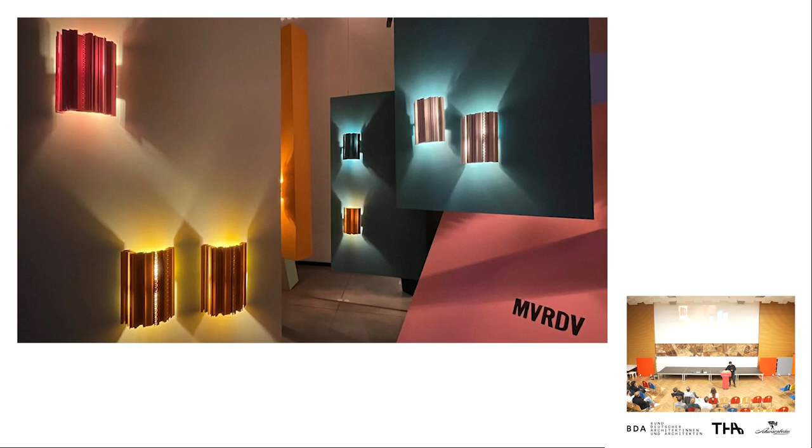Finally, last year, in 2022, it was launched in the Milano Salone. This was the showroom of Delta Light. Our partner Jakob was there in conversation with the Delta Light manager. And here I want to share with you a video of the make-of of the project.

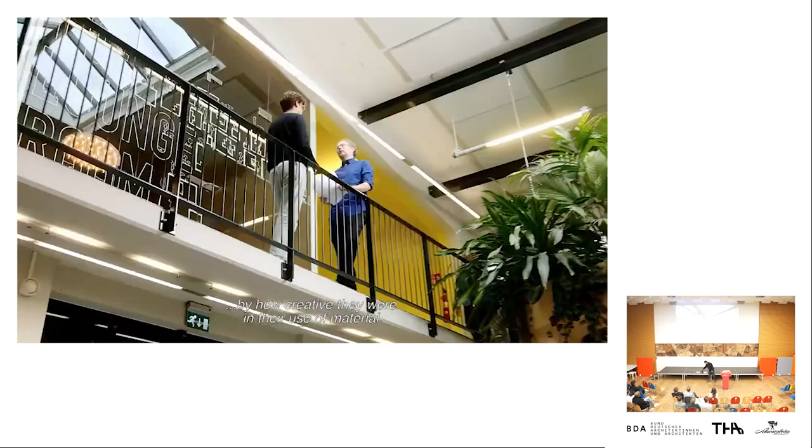MVRDV stands for surprising solutions to sometimes normal questions. We try to develop unique solutions for architecture, urban design, but also for landscapes, interiors, and even product design. In the past, we did several projects with MVRDV, and we were very surprised how creative they were in the use of material, also in the shape of their buildings. And we were thinking, why not introduce their creativity in our product range?

The real spark was when we visited Delta Light and we saw the contrast between the front of house, the showroom, and the back of house, the factory. There were all these raw materials stacked in a beautiful rhythm. The concept of HighProfile is basically taking the aluminum profiles that we saw in the factory, taking the leftover pieces, and assembling them in a new way.

And so a new product comes to life. How they use the raw material to actually build a fixture. You never see it, it's totally integrated in the architecture. And now it's becoming really a product on itself.

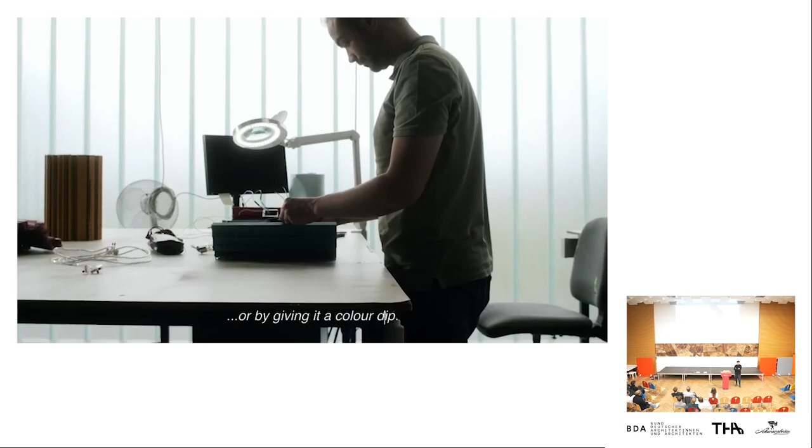HighProfile is an exciting example of upcycling. You have a waste material that becomes something more than it used to be, and in this case, it also has a sort of luxury feel to it. By dipping it into a colorful jacket, so to say, giving it a color dip, this waste becomes actually de-wastified. It doesn't look like that.

Color is a very important aspect in many of the MVRDV designs, and this is also something we wanted to bring into the design of HighProfile, also to add more color to the collection of Delta Light. So with parametric design, we were basically able to visualize many possibilities that maybe we could not think of just by ourselves. It basically helped us to think outside the box.

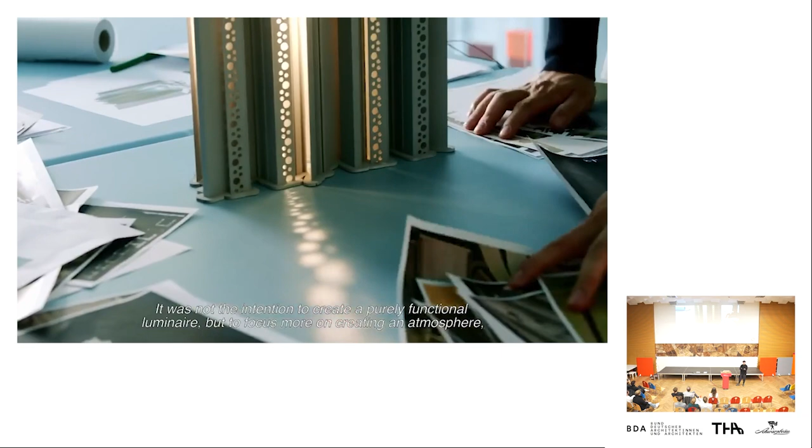If you zoom into the details of this design, you could also see it as a fragment of a facade or a fragment of a master plan or a building fabric. It was not the intention here to create a purely functional luminaire, but to more focus on creating an atmosphere, to work with indirect light, and to work with the play of shadows that this object is creating.

We have a lamp for the wall, a pendant lamp on the ceiling, a floor model. Basically anything can be built. What made me really happy is that the collection, in the end, combines the quality of Delta Light with the distinctive style of MVRDV.

Yeah, that's how it looks like, different versions. And we were quite lucky, we got the Design Award for Best Lamp Design for 2022. And now it's finally fully developed as sellable products, with serious technical brochures. And if you look at the price, you know it's definitely an upcycling project.

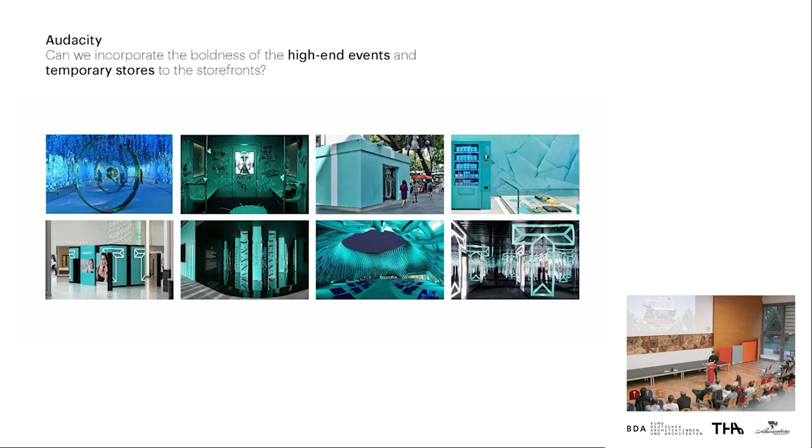In the beginning, the design team was exploring a lot of what Tiffany is, about things like love, their brand in New York, diamonds, nature, craftsmanship, dream, a 20th century icon. Also the question is how to bring all of this into modern times. One thing we can imagine is really about the materiality and also the iconography, transparency, context, audacity. So a lot of thoughts are going through in the design team's mind.

This Tiffany blue is a key identity of the brand. So in the end, all these different ideas also have to land onto the local site in Singapore, in the Changi Airport. It's not a store on the street, but it's inside the airport in an interior environment. And in the end, the design team was proposing to have this coral pattern.

It also reminds me of the beautiful Tiffany blue color, and also reminds us of this unfortunate sea turtle, stuck with a fish net and other ocean rubbish.

We came up with the idea, with support from some suppliers, that we could actually recycle this trash and make it into powder mixed with pigments. Eventually we can have a quite rich, solid, reliable, and also fireproof material which is 3D printable.

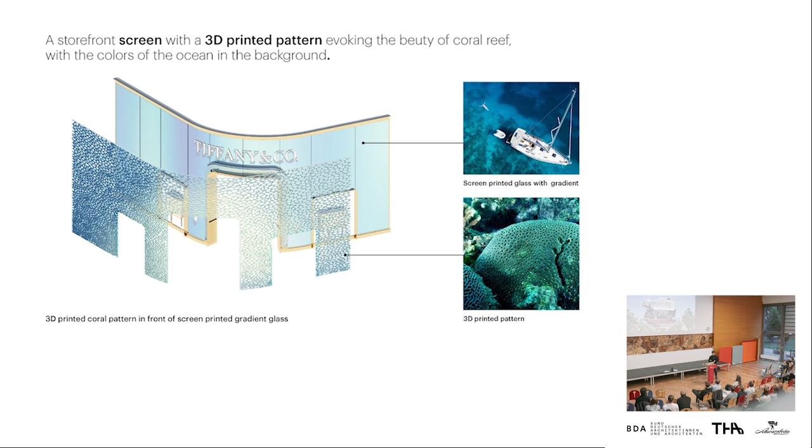As the computational team, we worked together with the design team to develop this coral pattern on the facade. Not only in 2D, but we also had to remap it onto this 3D surface, and play with the gradient of the colors.

This is the geometry, basically a Voronoi script with some attraction points, so you have smaller cells on the bottom and bigger cells on the top.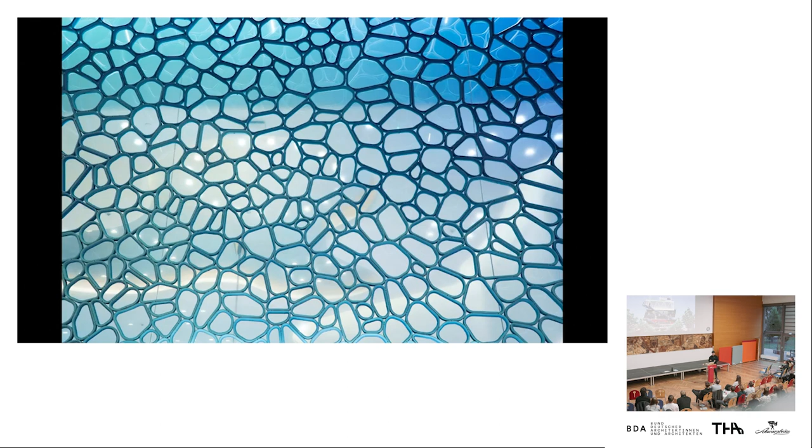In the end, it's just been released a few days ago, so luckily I can present it to all of you today. The facade is really beautiful, but it's actually made of recycled material - trash from the ocean.

When I was listening to Falk's presentation, it reminded me a lot of this project, because the circularity we have here is the first half. It's about the demountable part, but how it's going to be circular in the future, after the material's current life, we still have to see.

The effort here from the data-driven design, the computational team, is mainly about visualizing this demountability and telling the story to communicate to the general public, because otherwise the demountability also relates to this question of the database.

We actually uploaded everything, the whole BIM model as IFC format, onto the Madaster platform. But in the end, it's a very dry report with numbers, and the text is not very readable or accessible, let's say.

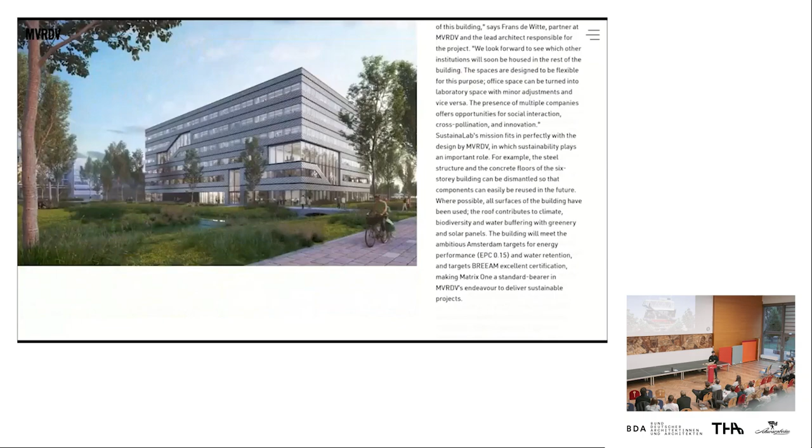What I want to highlight is that what's so special about this building, the demountability, when we tried to communicate this feature, we only had a very poor diagram saying 'demountable structures' and another diagram saying it's circular. By that time we were so proud of this demountable feature.

One of my other ex-colleagues is also here, Joshua - back then we were working together. We got a commission from the design team and the climate team to elaborate this.

We got a very comprehensive Revit model, and our task was to tell the story in a very visualized way. We rebuilt everything in Rhino, keeping their attributes, and tried different visual styles.

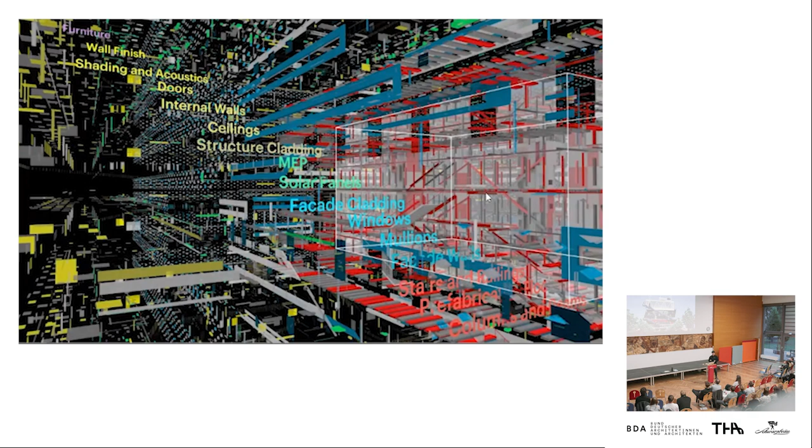We started decomposing the layers of the building and got all the Revit tags. We decomposed the building into different layers, ranging from the structure to the stuff, the space plan, the services, the skin, and the structure, sorted according to the lifespan of the components.

In the end, in the building there are 121,000 elements. Our effort is to visualize this in a very brutal way, rather than a simple diagram, showing how many building elements you're looking at and how many of them are actually demountable and have the potential to be recycled in the future.

Our effort here is to use the computational tool to visualize the mass amount of data and emotionally touch people, to make them aware of the potential of reuse.

So this is a movie in the end - we made a fictional movie where we demount the building layer by layer according to their lifespan.

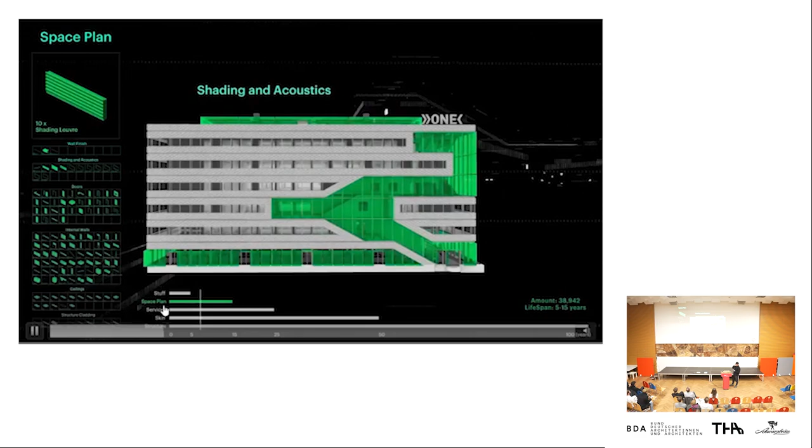You see, starting with the stuff, and now we move to the space plan, which has a lifespan of 5 to 15 years. On the left side, you see the catalog of them - how many pieces, what's the shape, what are the attributes, how many pieces are there.

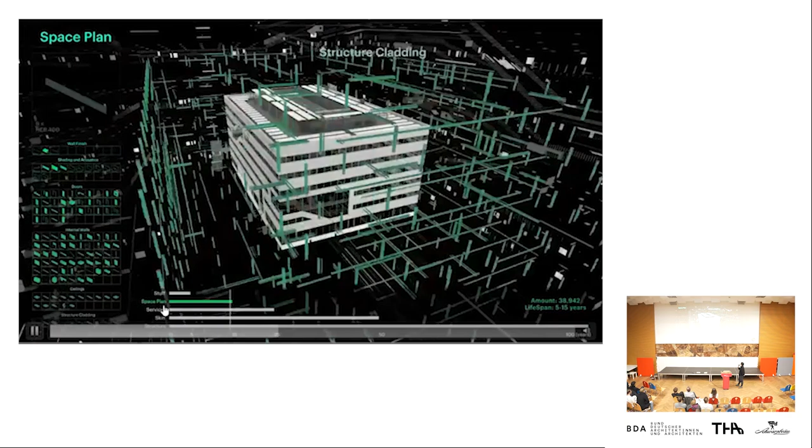The ceilings, the structure cladding, and now moving to the services, which is the MEP - all the pipes, even the plugs, the solar panels. And now moving to the skin, which has a lifespan of 25 to 50 years.

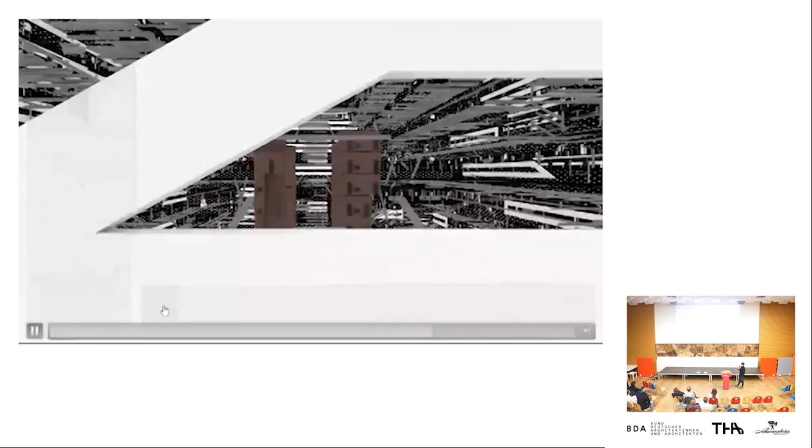As time goes on, these building elements are demounted, and in reality they would be stored somewhere in a warehouse. But here is a visualization of them being uploaded to a cloud archive - a database where future people can have access and see which parts of the building they can reuse.

This is from the opening - our partner Frans and associate Mick were using this video to explain to the public how the idea of demountability works here.

And here is actually the opening. I was imagining if everyone would give them a wrench or something, they would really demount one piece of the building and take it home. That would be really fun.

So here is the overview of the projects I have been talking about, and I have some reflections instead of conclusions - a few thoughts.

First, from the sustainability point of view, designers like us should always bear reuse in mind and think about the full lifespan of materials, like the circle that Falk was mentioning - keep them inside the circle.

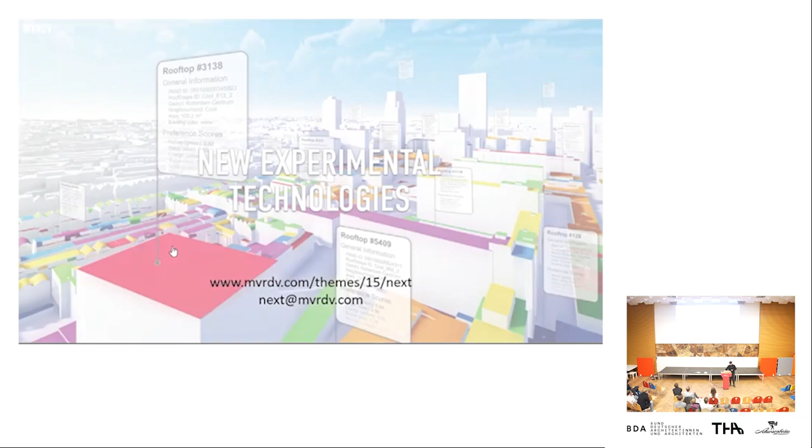Since we have a few more minutes, actually I have a few bonus slides. I was afraid it would take too much time, but also today we have been quite serious.

Like Falk with this very comprehensive menu of circularity, and Michelle showing her study and practice of how to reuse windows. Here I try to, maybe it's a bit deviating, but in a broader term of reuse, we can take a break from the physical world, which relates to this project here.

It's Art City. It's actually a virtual project, and it's a fiction. And again, the role of data-driven design here is about visualization and storytelling.

So this is actually a project for an art fair in Amsterdam called PAN. Every year in November they have this event, and every time they invite artists or designers to design a campaign image and promote their event. Last year they invited MVRDV and The Why Factory to design the promotion for them.

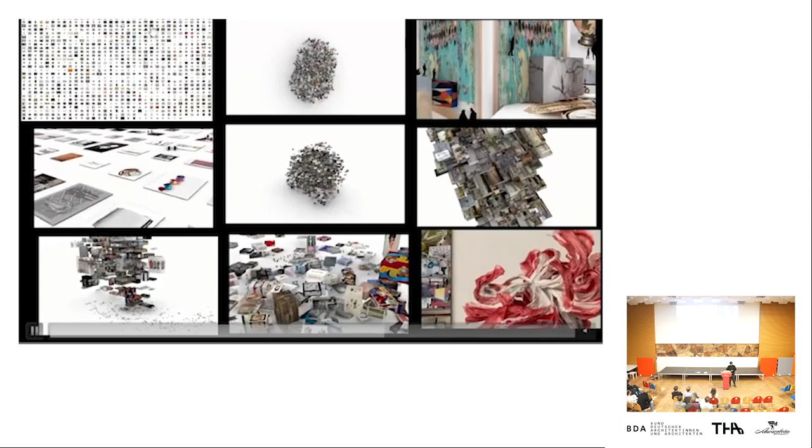We were discussing how to compose this fictional city, starting from sorting the art pieces by their different attributes, and then how these art pieces become a grid city, and then start to morph into different holistic shapes where people can have a different experience there.

So in a way, it's a practice of reusing existing art pieces to create a new kind of art. So this was the event, with our campaign image.

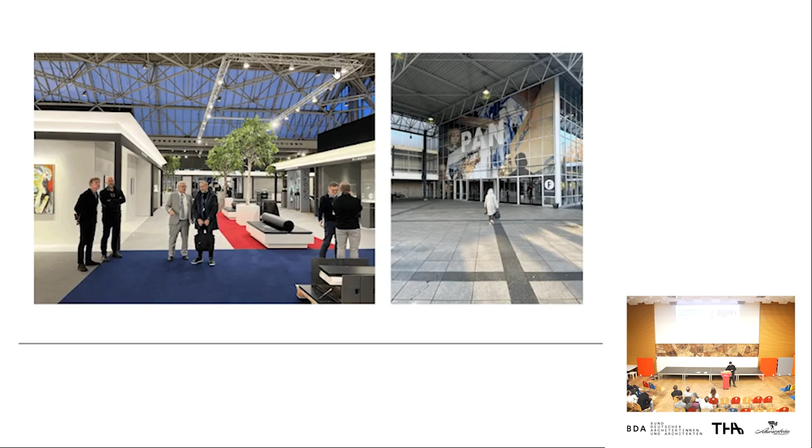In that week, our image was everywhere in the city, in metro stations, bus stations, and our movie was there in the lobby.

It's quite funny that some of the art dealers found out that their painting was on the cover of the campaign image, and they even held a small conference to discuss why the designer was using her art to make the cover of the campaign image. So in this way, we are composing the art dealers and artists together.

By coincidence, they start to have some talks, some networks, because of our Art City composition. So to end today's talk, I would like to present this last film to you.